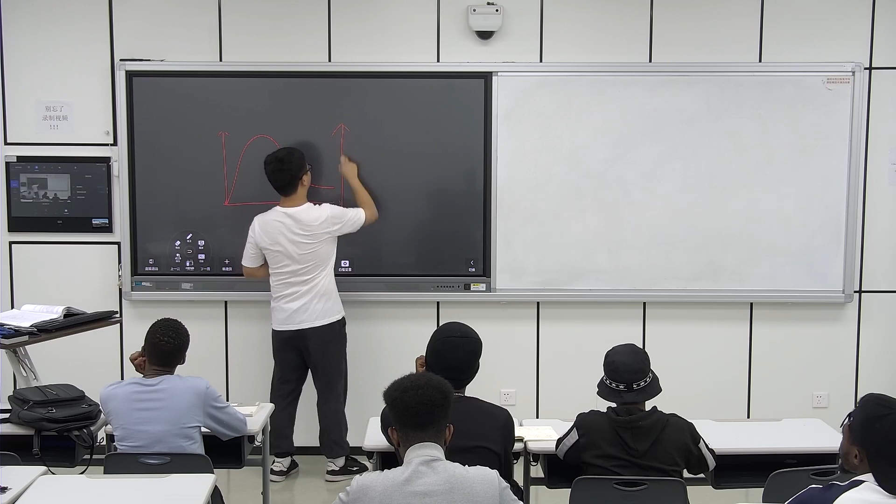I also introduced the concrete specimen under biaxial load, right? The curve is different. This is the stress-strain curve of concrete under the biaxial load.

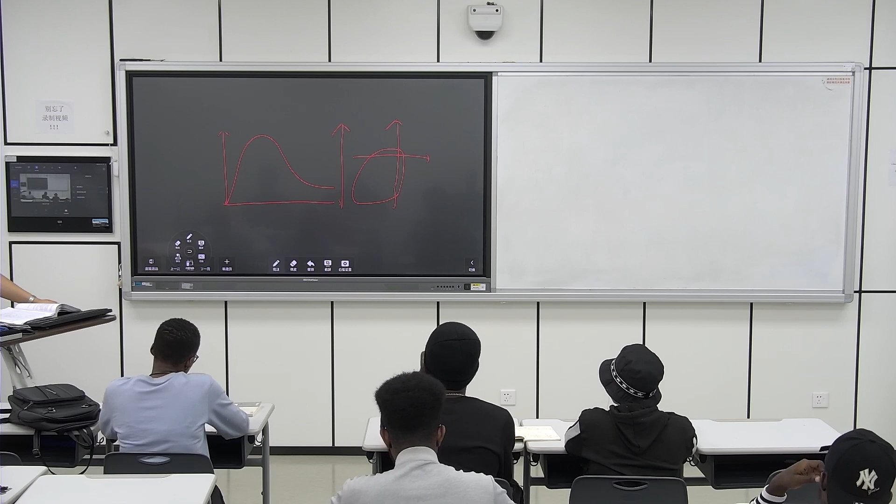And I also introduced concrete specimen under triaxial load, yes. That's the things what we learn now. And from this part, we know the mechanic - mechanic property.

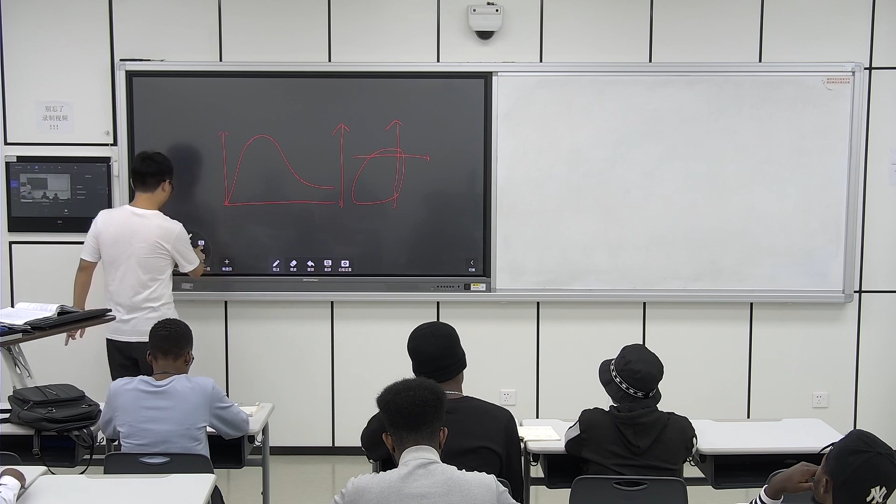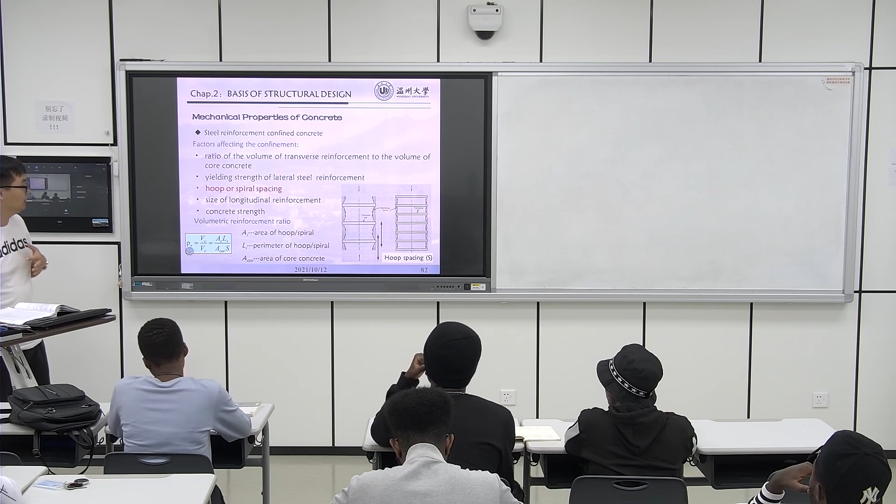And we know the mechanic property of concrete under three direction load. Then we propose the steel reinforcement confined concrete type - there's a steel tube and poured concrete in it. It will be used to build the header, the column, and other members for structure.

Here's the internal logic code that I hope students can master for this part. Which one are you supposed to master? For these years we learned three direction loads applied to the concrete, and we learned concrete under two direction load, triaxial load - that we propose the type of reinforced concrete, the steel reinforced confined concrete.

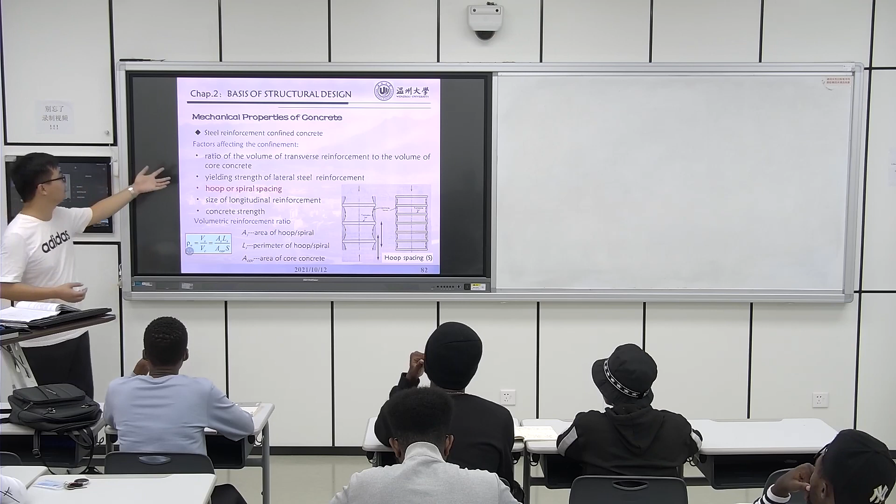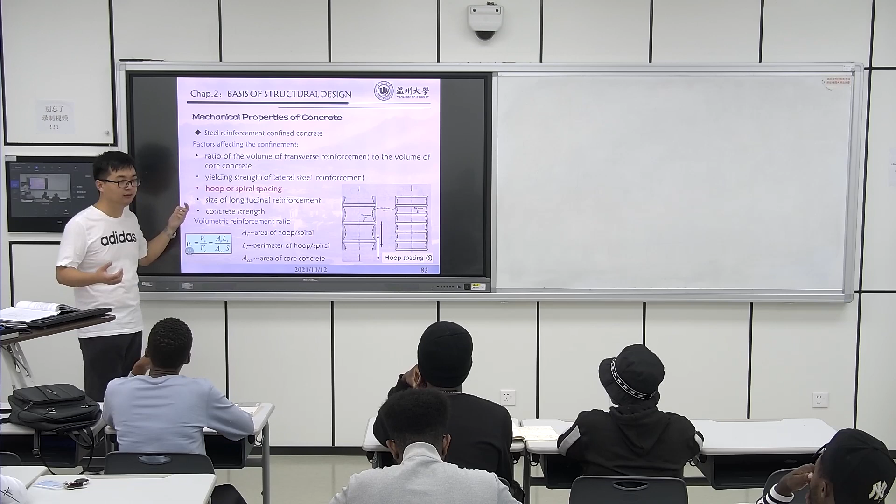For this type, this is just a type of reinforced concrete. Normally we use steel bars in the concrete - this is the type of reinforced concrete. But there's another type, right? There's another type. If you have any problems, it's okay, just tell me, right?

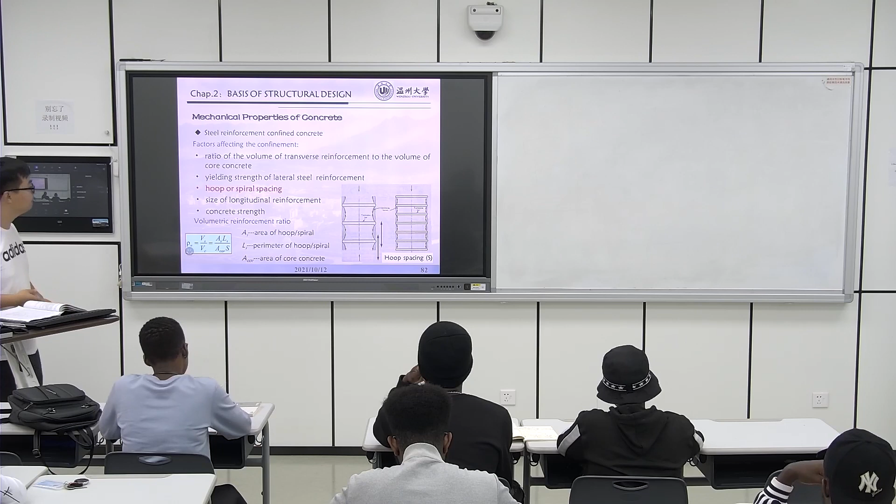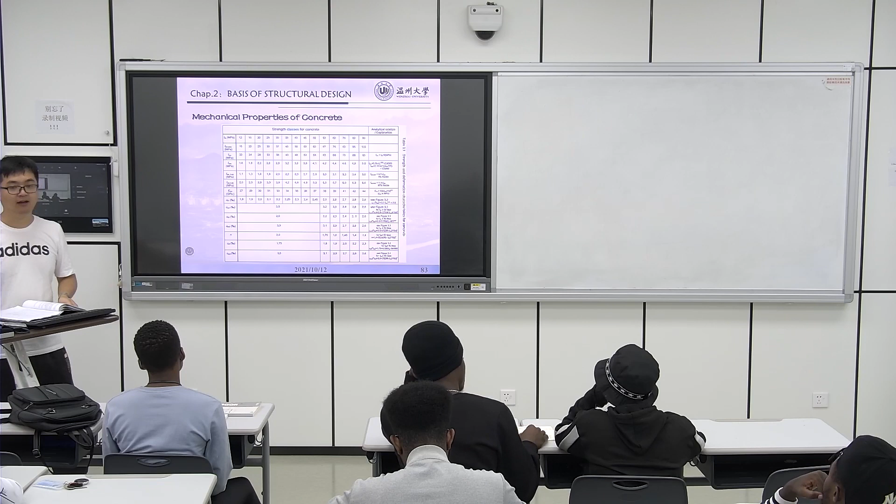From these tables, they list several concrete strengths - this means the different degrees. Do you remember there is a critical value to classify concrete as normal strength concrete and higher strength concrete? Do you remember the critical value?

C50, right? C50. If the concrete strength is lower than C50, that means it's normal concrete. But if its cubic compression stress is larger than 50, that means it's a higher strength concrete.

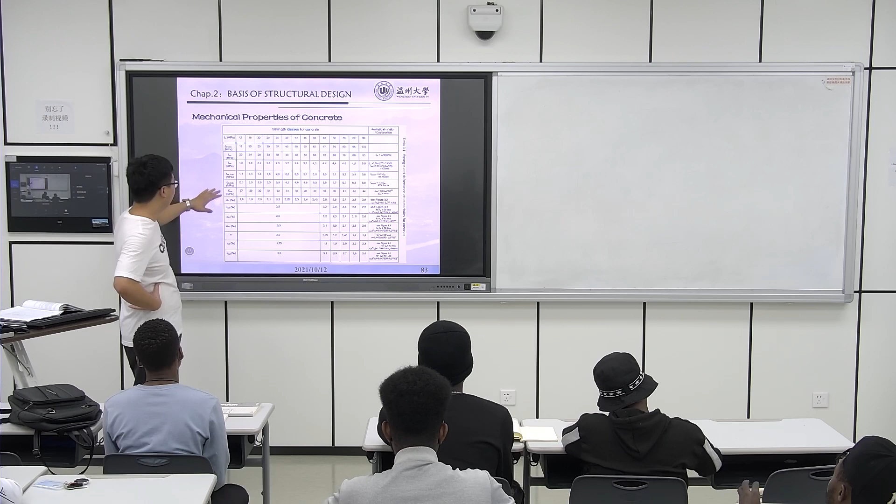And look at these tables. For there, they list the cubic compression strength and the prism compression strength, and also the tension, right?

Tension strength and also the strain. Do you remember the stress-strain curve? Here there are two strains we need to remember. One is the destroyed strain at around the value, E is around 0.0033, right?

So here this table lists different types of concrete. There are characteristic values.

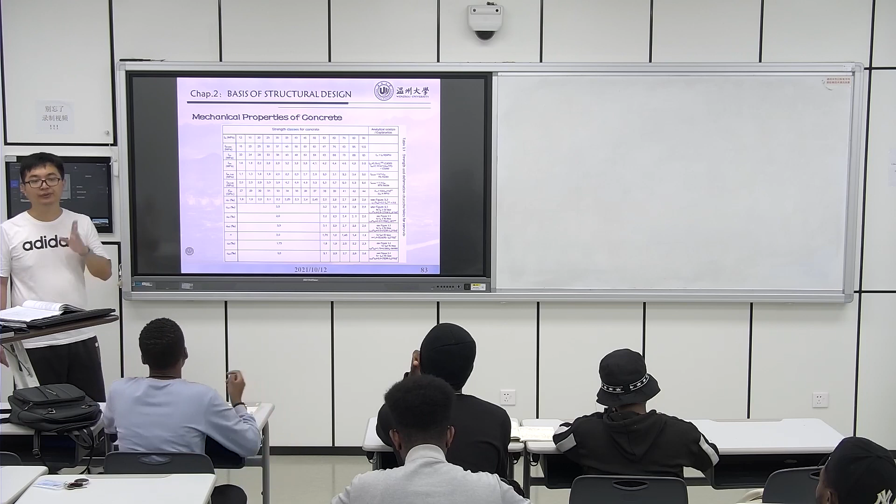And maybe in the future, or maybe next semester, you need to finish a design work. There is a will related to which type of concrete you will use in the structure design. So if you're not clear about some characteristic values, you need to go read the code and find them. So this table will be workable, will be useful.

So here, I use these figures. End of this part, talking about the concrete. Okay.

And then we go to the next section to learn the shrinkage and creep of the concrete. That belongs to another part. Okay, if you think you do not master the before part, before the section, you need to read the PPT after class.

Now we will begin another. I think that before part is enough for us. So now we just go to the next part.

For shrinkage and creep, from the word meaning, I think everybody can have a rough idea to know what shrinkage is. Shrinkage means the volume becomes smaller, right, for concrete or material. For creep it means the values will be larger.

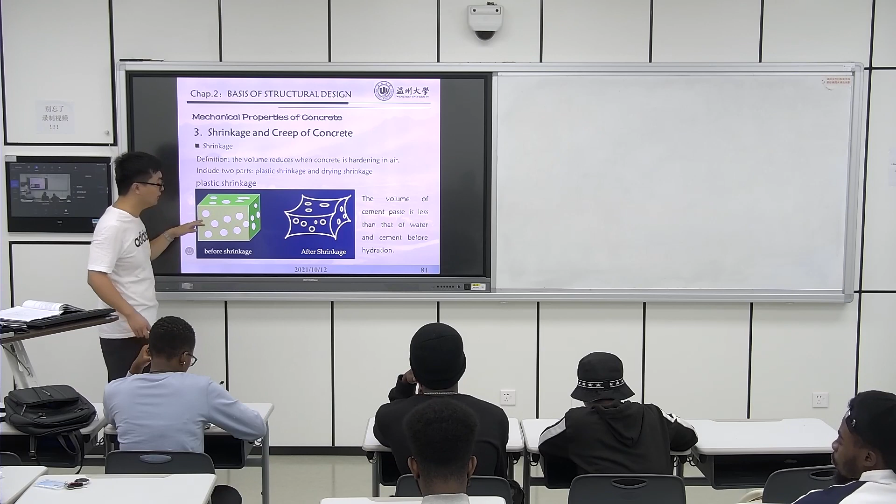Plastic shrinkage is about the material, like the cement. This material, during hydration, its character changes. And for drying shrinkage, it's the water evaporation—there are bubbles inside.

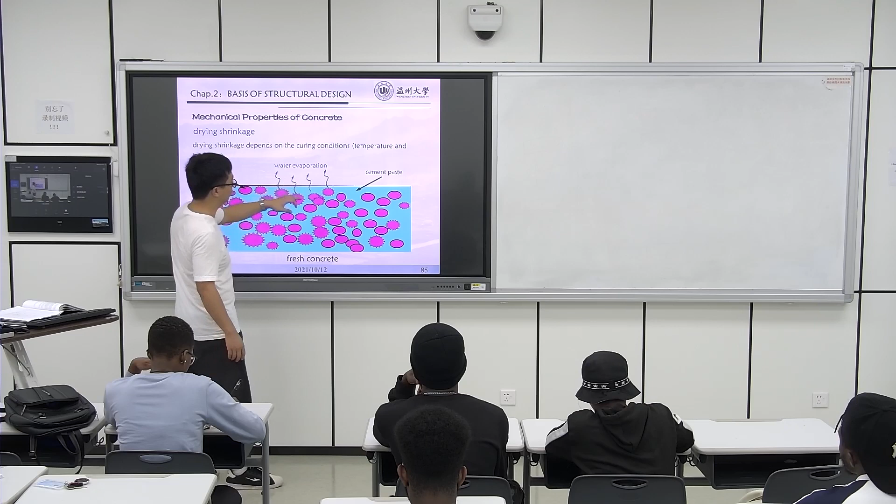So here, we need to realize there are two shrinkages for fresh concrete. There are bubbles in the air, the bubbles, the water escapes, and here the empty space has air coming in.

So the shrinkage is really a problem, right? Really a problem to the concrete. So for us, we want to control it, we want to reduce the shrinkage during the hydration.

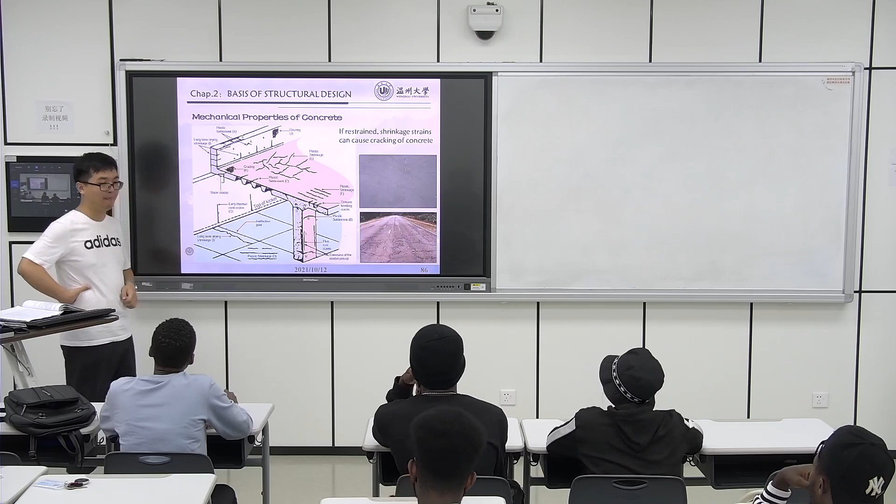This is the rate. But for concrete, the shrinkage strain always increases with time. Always increases with time. Just the rate is different, right? Rate is different.

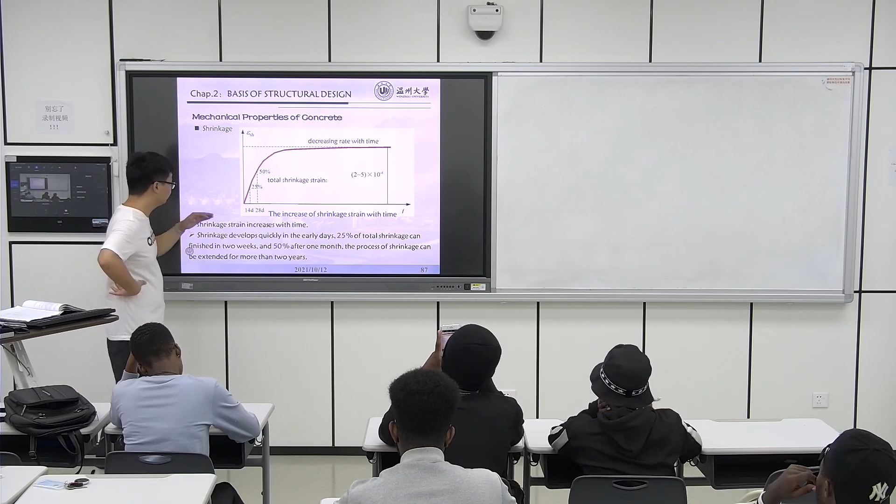This is the curve that used to describe the shrinkage. So the shrinkage developed quickly.

It will reach 25%. Almost we think this one is 100%, but in the beginning of the 2 weeks, 14 days, the shrinkage already reached 25%. But after 2 weeks or 4 weeks later, it's half.

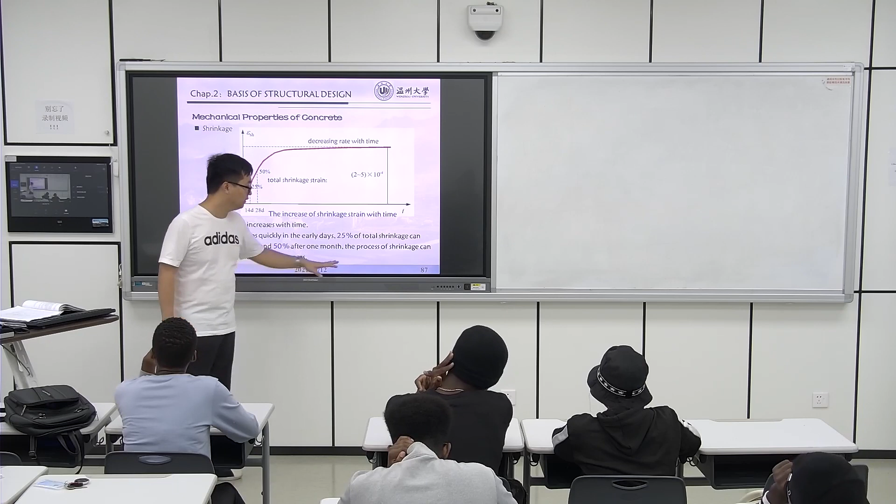After a month, the process of shrinkage can be extended for more than 2 years. This time, after the 50%, it takes around 2 years to reach the final shrinkage value.

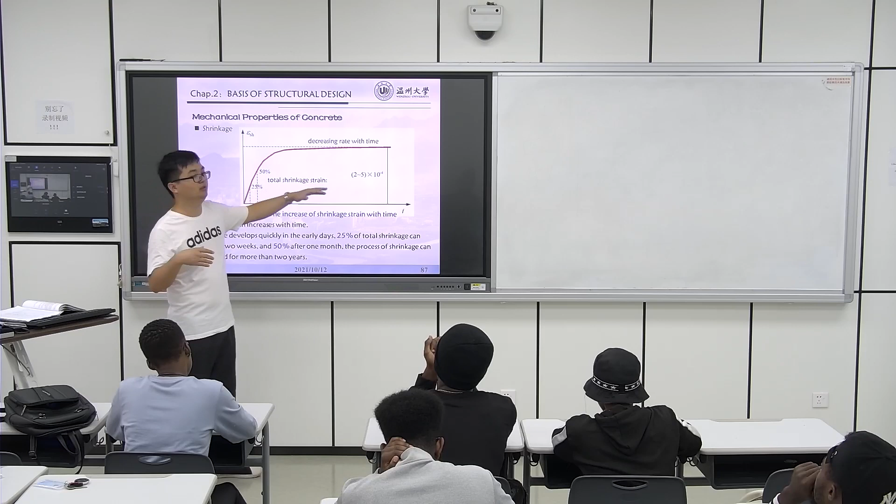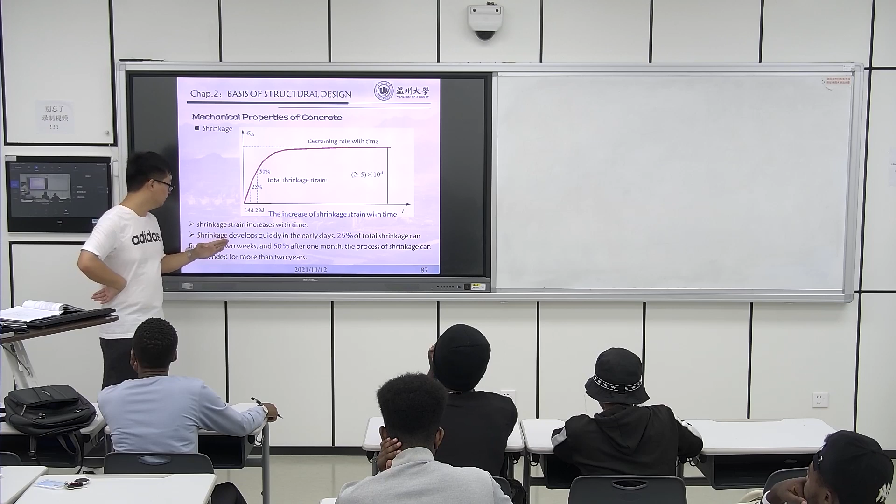So this is also a characteristic phenomenon about shrinkage. At the beginning, it quickly develops, but after 4 weeks, a month, it grows slowly.

Now we know the characteristic phenomenon of the shrinkage, how it developed. So some researchers controlled some parameters to help us realize the principle. They did several experiments and wanted to obtain which parameter or which things will affect the shrinkage. So they did the experiment, and what they got is drawn in these figures.

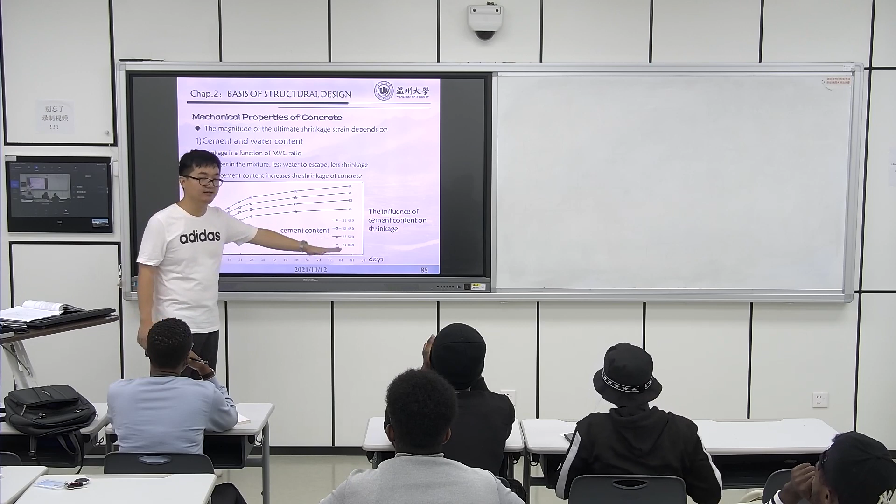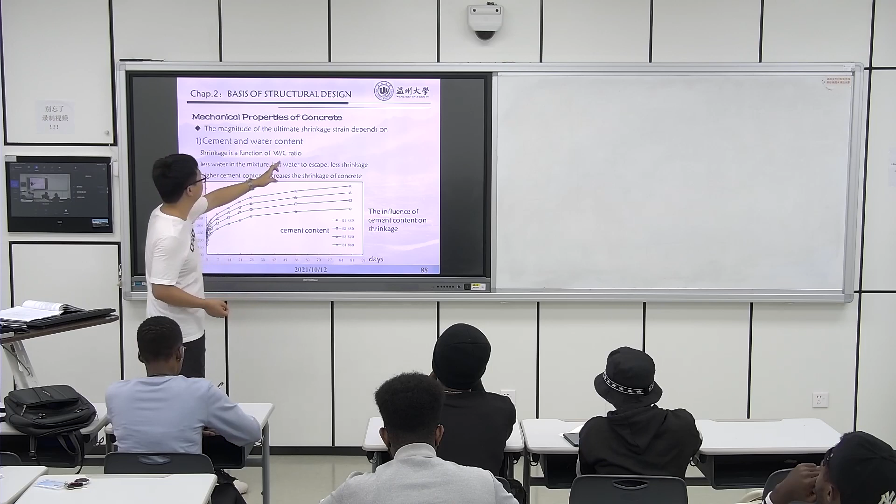For these figures, this one is the shrinkage axis, this is the time axis, and there are four curves. These four curves represent different ratios of water divided by cement, and the water content. This is the water-cement ratio.

Less water in the mixture means less water to evaporate, so less shrinkage. So the water divided by cement ratio, if this ratio is lower, that means when we mix concrete, we use less water, so less shrinkage, let's recall that.

Drying shrinkage is related to the water, and the plastic shrinkage is just related to the material, the skeleton of the concrete, just like the cement.

So for here, the higher cement content in the concrete increases the shrinkage of the concrete. Higher cement means it will affect plastic shrinkage.

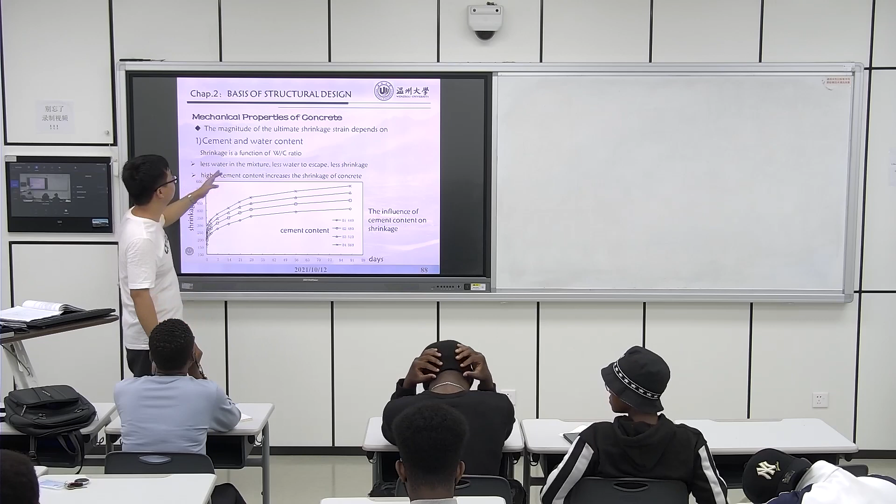The cement also has its own characteristics here. So for these figures, we know the magnitude of the ultimate shrinkage is related to the cement and the water content, and just know, the less water, the less shrinkage.

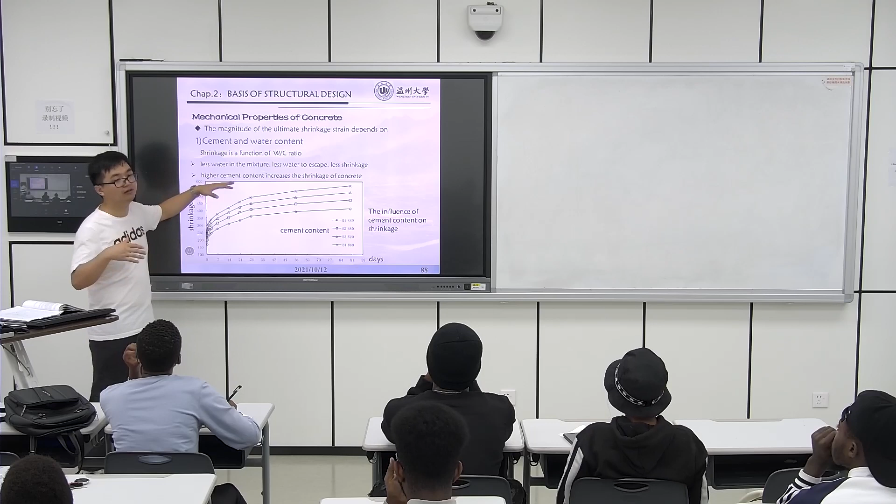And regarding cement, we do not mention the cement grade and such matters, because for this one it's hard to control. Because to make the concrete, it's produced by the local factory, so it's hard to control.

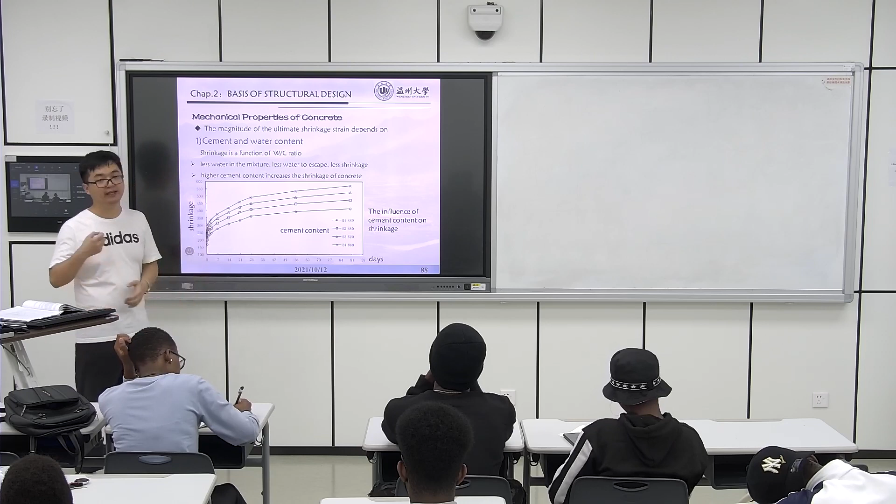But the water we can easily control. So for us, wanting less shrinkage, during the mixed concrete process, we need to realize the water is an important factor that affects the concrete shrinkage.

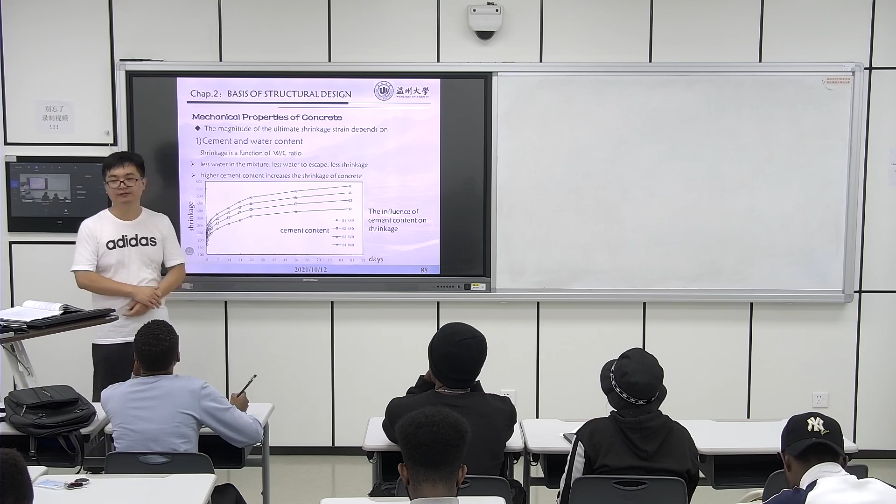Okay, this is one factor. Another is the elastic modulus and the gradation of aggregate. Aggregate in the concrete provides support, provides the strength to the concrete, because for concrete, the cement and the water are just the smooth things beside the aggregate.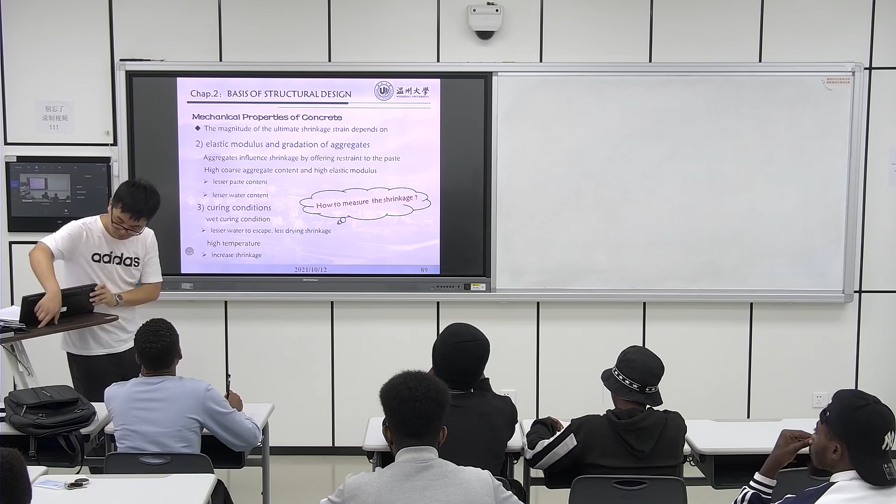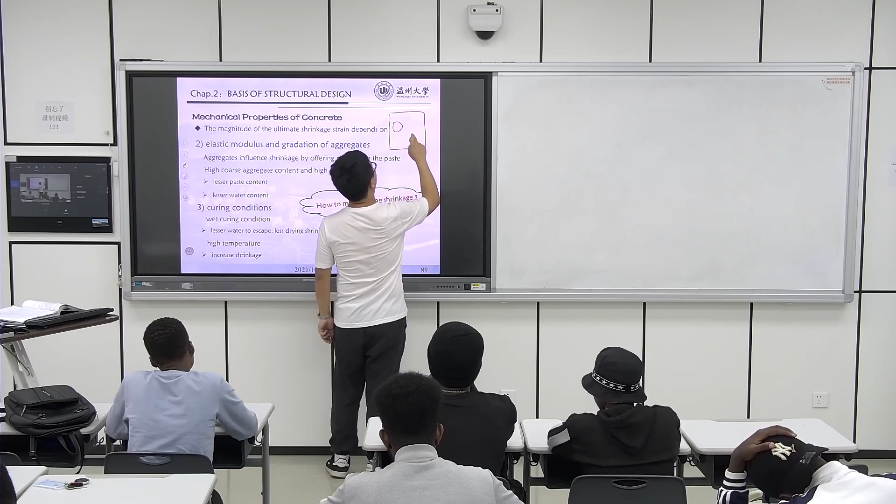For the aggregate, they also influence the shrinkage by offering restraint to the paste. For concrete, this is the aggregate, this is the cement around the aggregate.

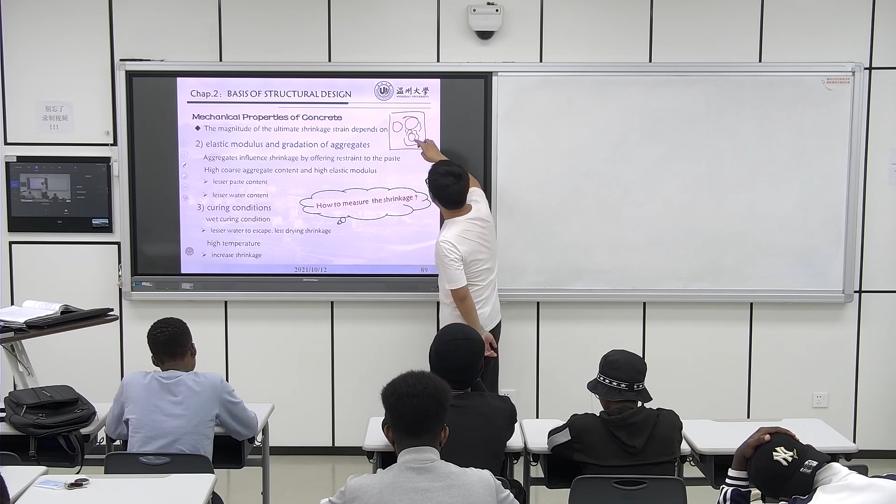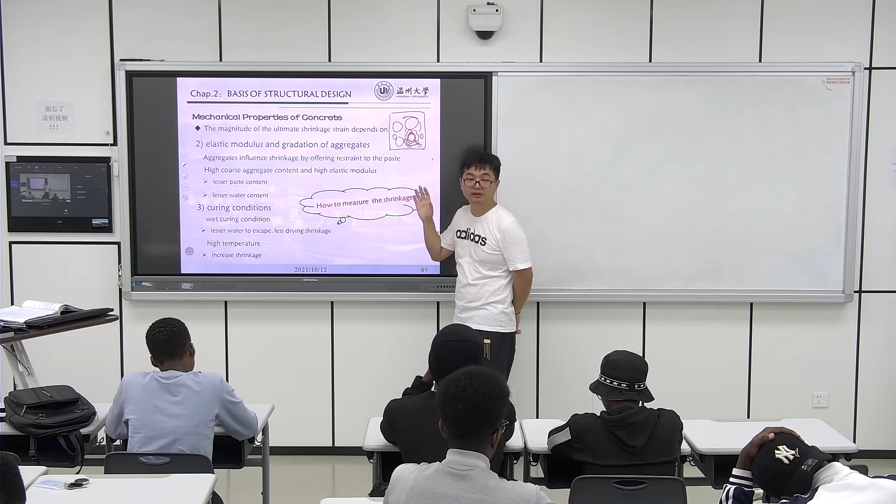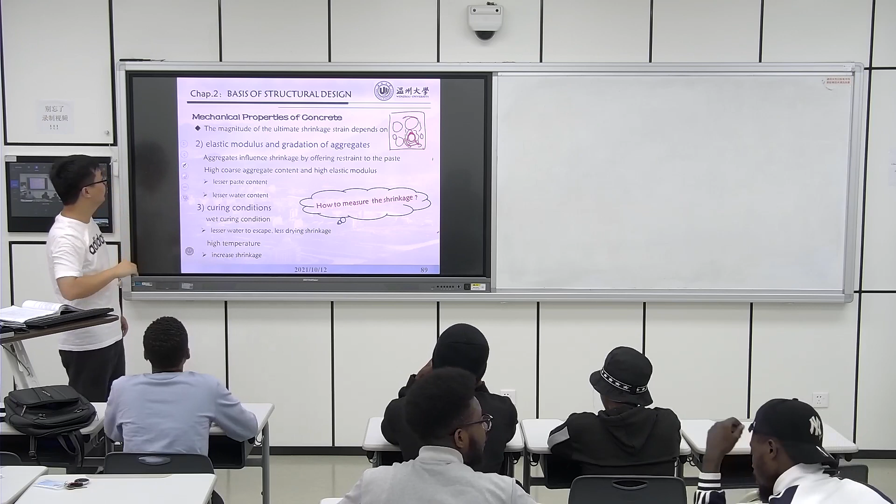If the cement wants to, there's a plastic shrinkage happening to the cement, but if there is enough aggregate, it will restrict the cement. It will offer restraint to the paste.

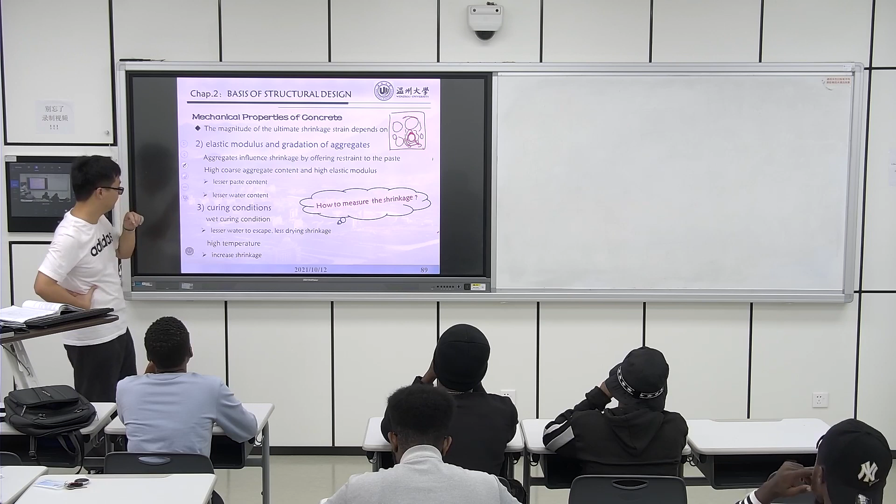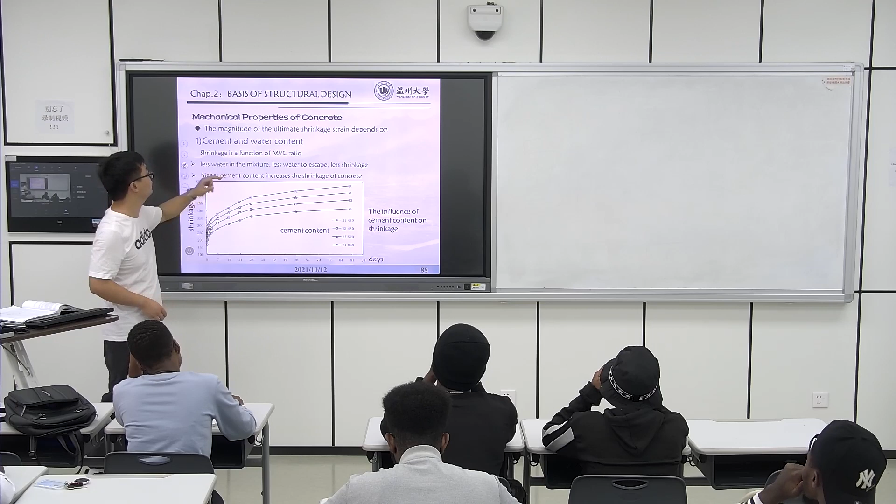And another factor is the curing conditions, which will affect the water evaporation. So to summarize, researchers identified three things: cement and water content, the elastic modulus of the aggregate or the gradation of the aggregate, and the third reason is the curing conditions.

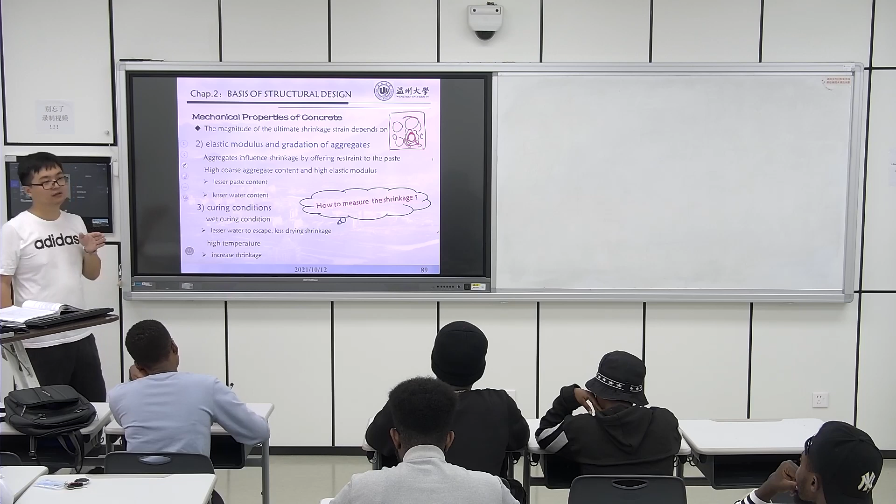So if one day on the exam, the question is please write the reasons to control the shrinkage, please write something to control, you need to know here's the three factors.

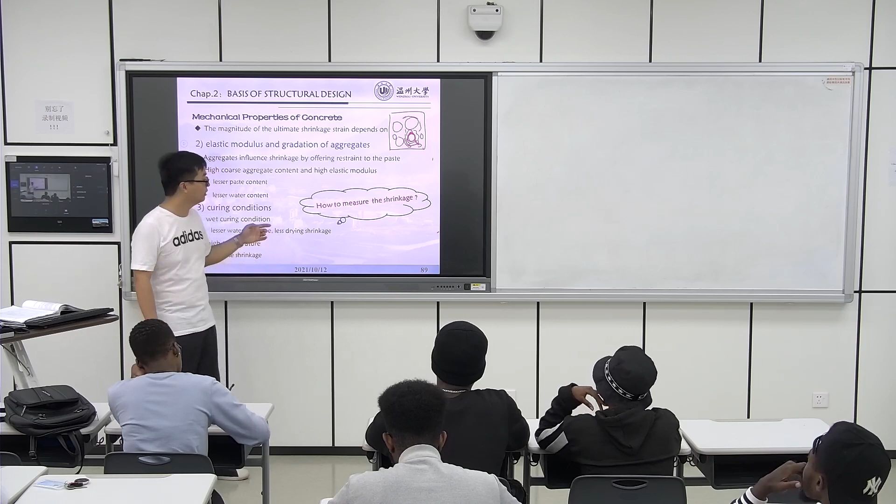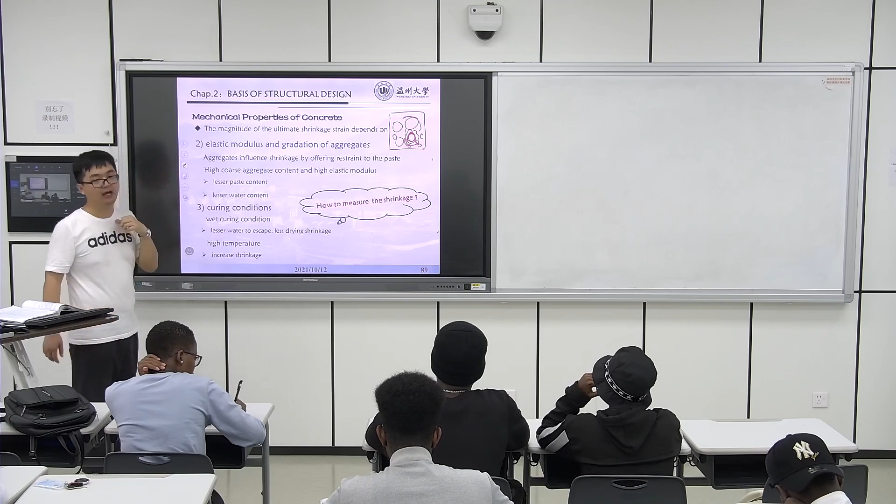And here I leave you an interesting homework: just think how to measure the shrinkage. Because before we just directly provided the shrinkage values, but did not mention which method to use to get the shrinkage. So just leave this interesting homework, let you find some material to read and know how to measure shrinkage.

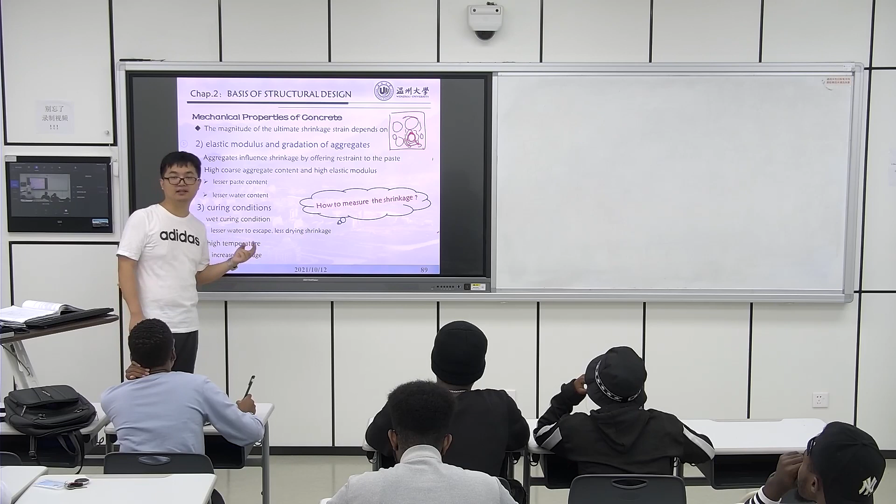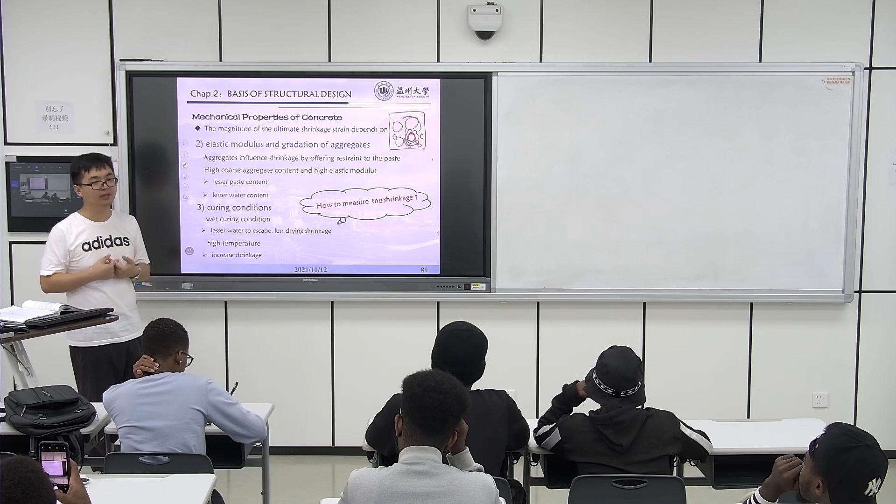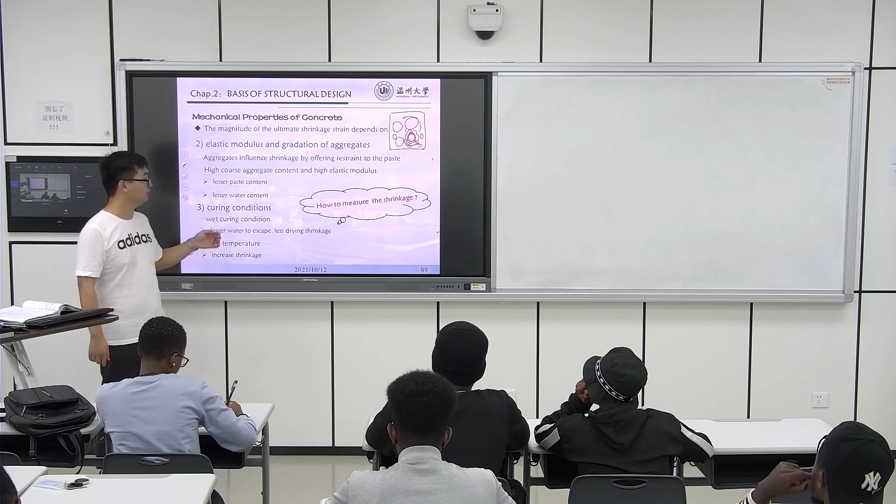This is the second interesting homework. Until now, I do not leave any homework that needs to be submitted to me, but just interesting homework for you to widen your knowledge, to learn different things. I do not request you to finish by any deadline or submit to me. It's not necessary, let's just leave this small interesting homework.

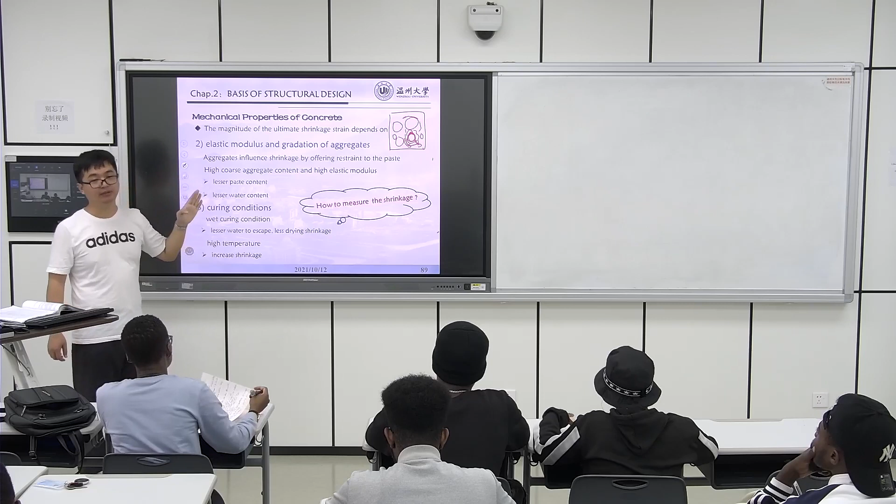So for this part, before we knew the phenomena, the shrinkage and the shrinkage type, and which factors affect the shrinkage, and now let's realize how exactly the value will occur in the concrete, to do some calculation.

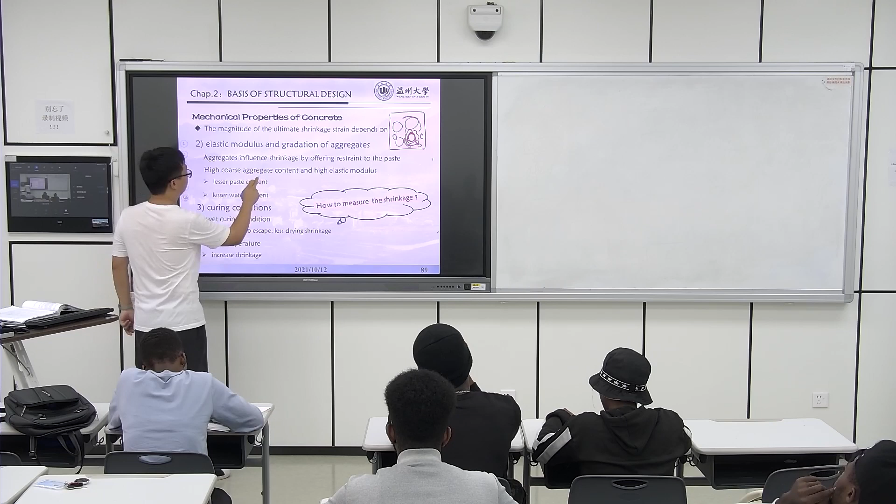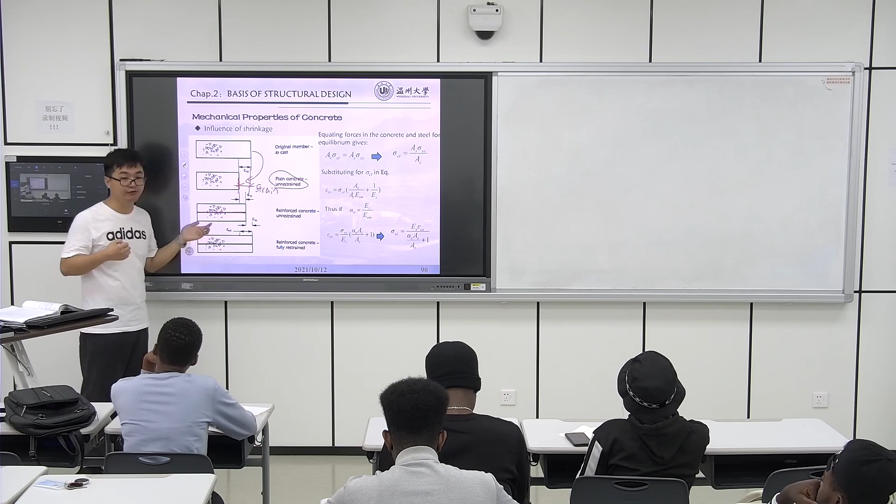This is the strain caused by shrinkage, right? The unrestrained. But for this specimen, this one is the steel bar. They will provide a restraint to resist the concrete shrinkage. This is the reinforced concrete, we put the steel bars in the concrete. And this is also for the strain caused by shrinkage.

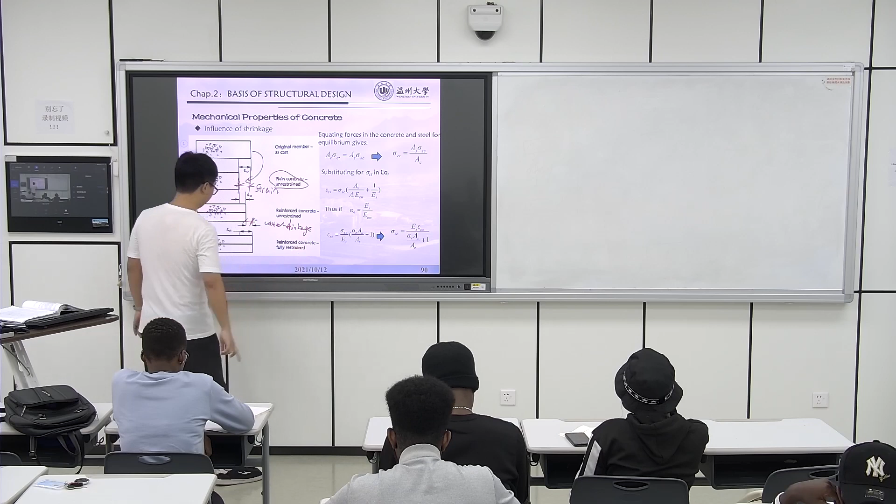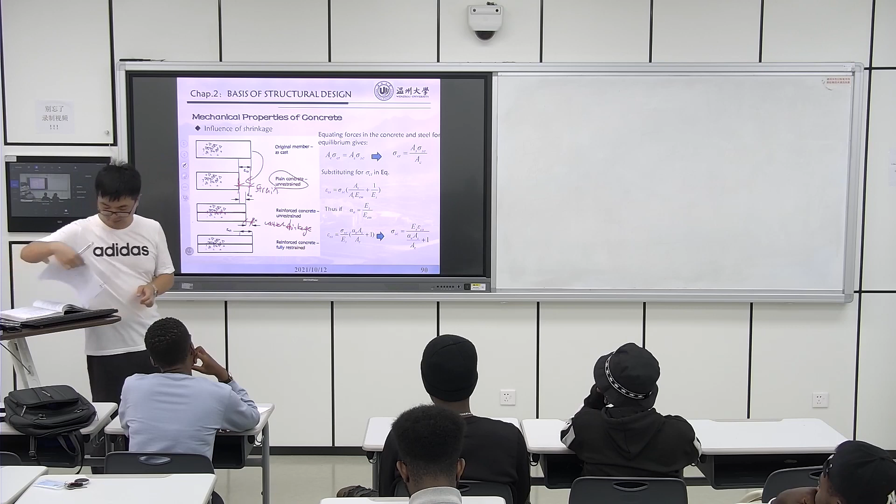So for now, I introduced exactly the relationship that exists here. For what we learned in material mechanics, right? This is the strain, right? Strain and the strain CS, they have the relationship, right?

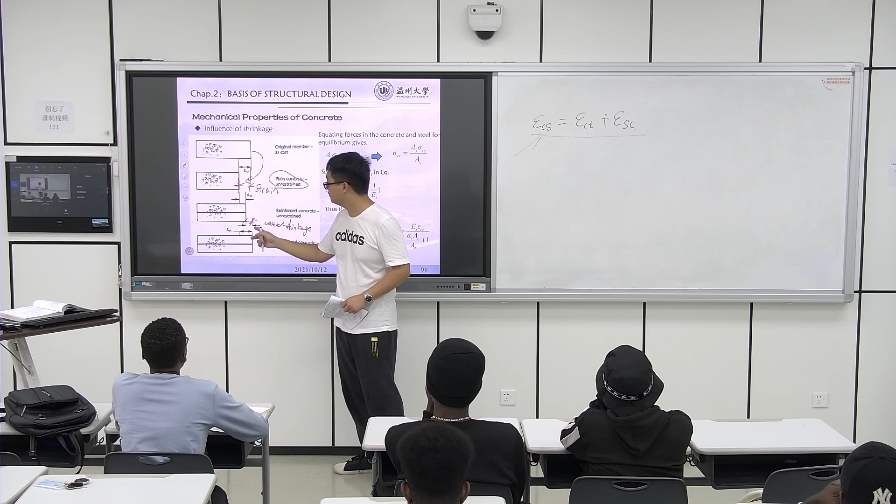Can you understand this formula here? For this one, we do not have the steel bar, that's caused by the shrinkage, right? This is the big value. But if the steel bars are in the specimen, they also affected by the shrinkage, so they also have the strain caused by shrinkage, but this value is less than before, right? Because of the restraint of the steel bar. So this value is smaller, and then we can use this value to cut to these values and get this is the restraint strain provided by the steel bar here.

Here I will ask Wenqi, can you explain this formula for us?

Okay, everyone pay attention. Do not focus on these two specimens, we only see the first one and the second one. This is the strain, right, that's caused by shrinkage, yeah, it is the total strain. And do not see the second one and the last one, and we just imagine there has the steel bar in the concrete. They also will have the shrinkage, but this strain value is smaller than the specimen that doesn't have the steel bar.

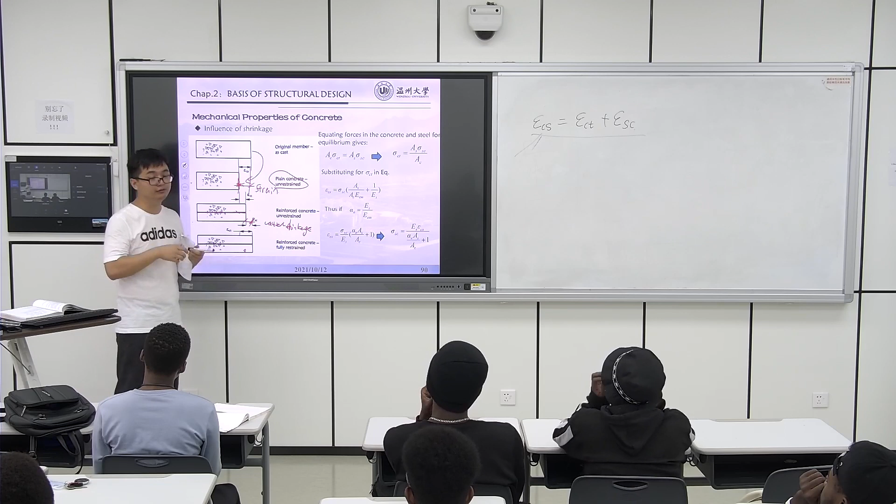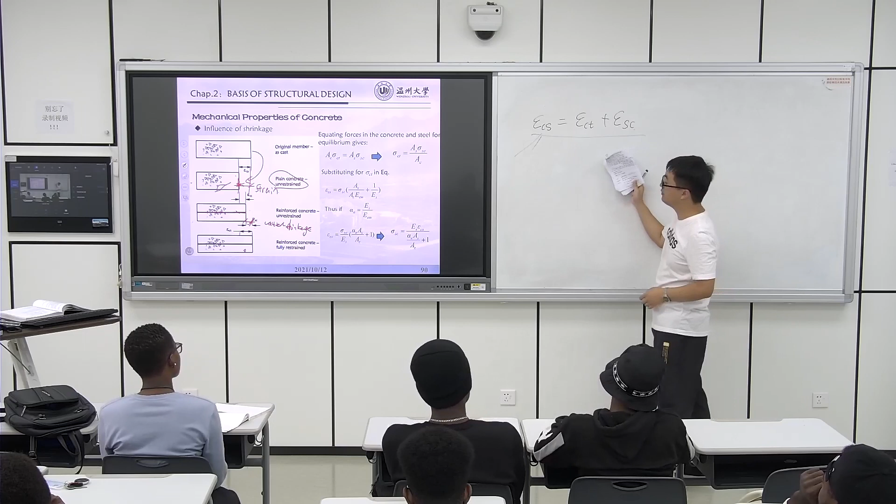You can imagine this, right? Because the steel bars in the concrete will restrict the concrete. They just like a support to resist the concrete shrinkage, right? So this value, compare to the specimen, this has the strain value. And we can use, so they have the relationship: this one is totally the concrete shrinkage, for this one is they had steel bars to shrinkage, and for this one is the steel bar providing the resistance. This is the strain, right? These are all strain, but the meaning is different.

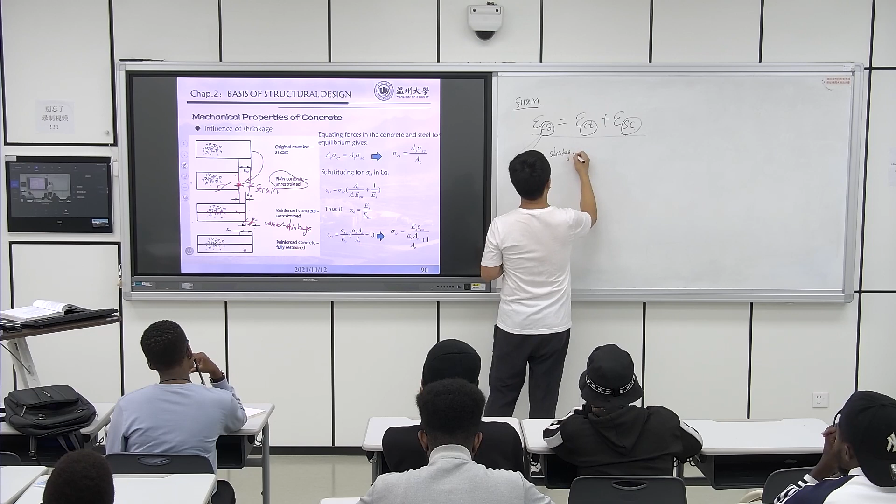So from these figures we build the relationship, right? The strain relationship. That one is strain, then CS. What does CS mean? CS just helps us to distinguish. This one, CS means, look at here, they use this symbol to represent the shrinkage, right? The concrete shrinkage, maybe you can remember the concrete. So you may use CS, okay, CS.

And for the CT, maybe it's concrete tension, not tension, because here the CT is the steel bar. Steel bar, they provide the restraint to the concrete, not concrete shrinkage like before. I think CT and the SC here are just symbols to represent this type of strain. For SC is the shrinkage, right? This shrinkage occurs to the reinforced concrete here.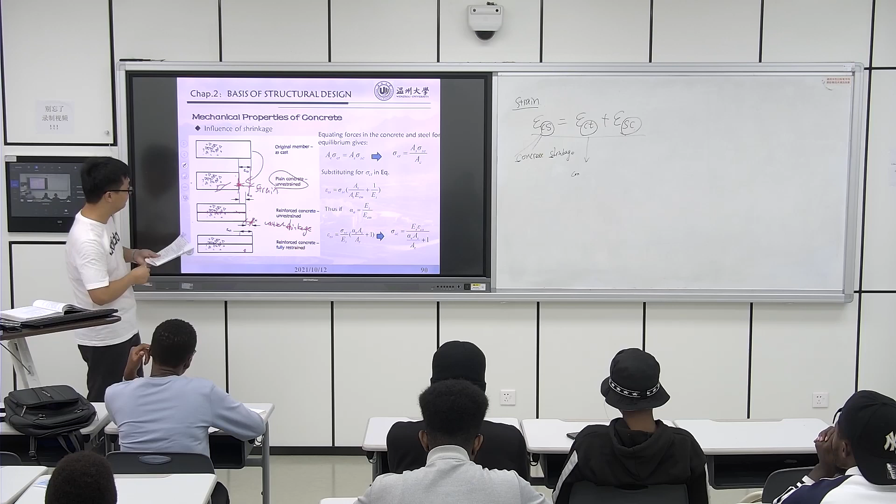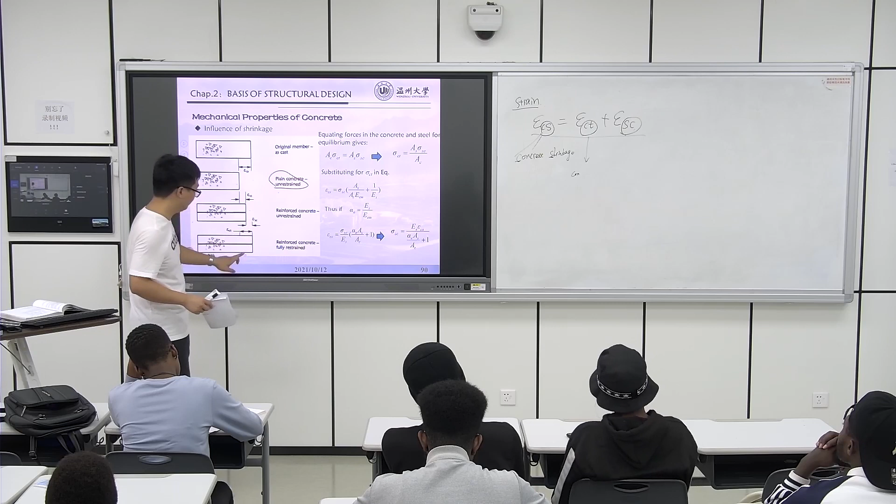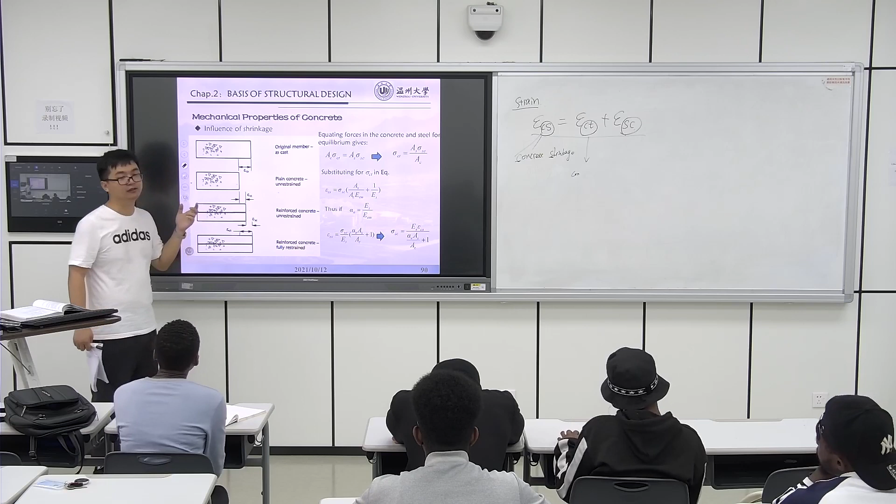Yeah, we needed to know this strain relationship, and then we can do the calculation to know how much the shrinkage will cause, how big the stress in the concrete here. Okay, I will continue. For these figures, I just want you to know the relationship: if there's a shrinkage, how many strains will occur, and if for the reinforced concrete.